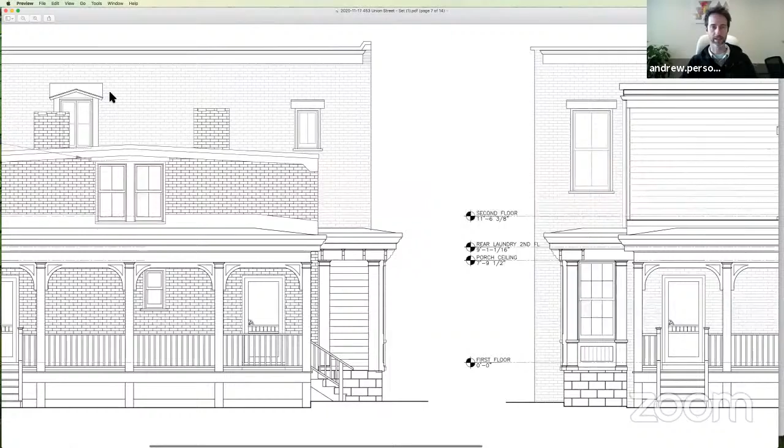What we would like to do - let me switch over to the original submission. In the original submission, the way the building appeared from the rear, we were bringing the brick line down. I'm going to draw a line for clarity. We were bringing the brick height to level across the building. Let me just make that a little thicker. So we were taking it down to level and then going up with wood from there to the height we were trying to achieve.

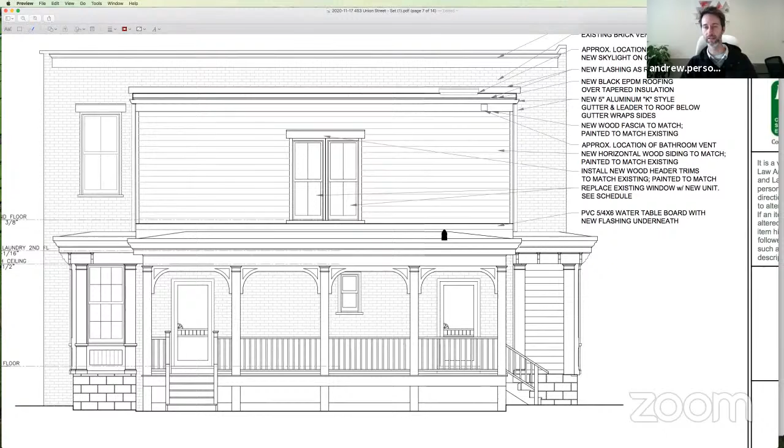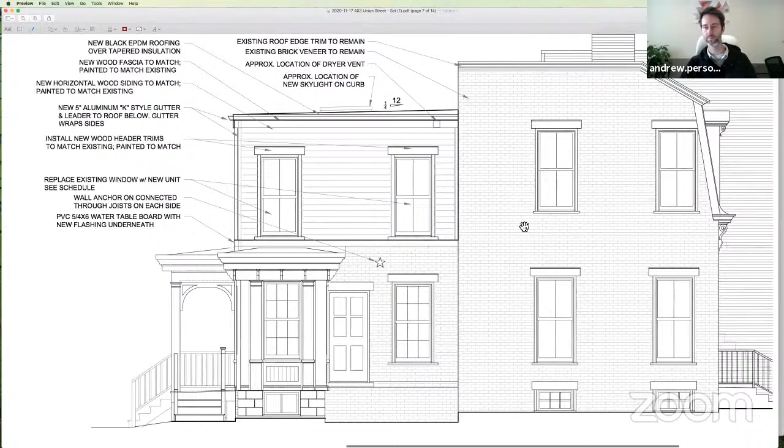So the difference between the prior submission and this submission is that now we would like to actually take the brick down to the sill height so that it's just wood for the upper level. We're keeping our window heights the same. We're keeping our windows - basically everything that was specified before is going to be the same, with the difference being where the line of the brick was. Before I think it looked a little odd, but the brick line was kind of at the center of the windows. Now we would have wood all the way up, and this is how it would look on the side. That's the only real change from what was approved.

Thanks, Andy. Commissioners, thoughts, comments, hopes, dreams? I think it'll look better this way. Go, John. Agree with you. Agreed. I also think, as a matter of approach, having this new renovation look different than the old one is kind of good from a preservation standpoint - it looks like it was a later addition, which it was. Agreed, I think it's just fine, and we really appreciate you discovering this during construction and coming back to share your discoveries with the board. That's terrific.

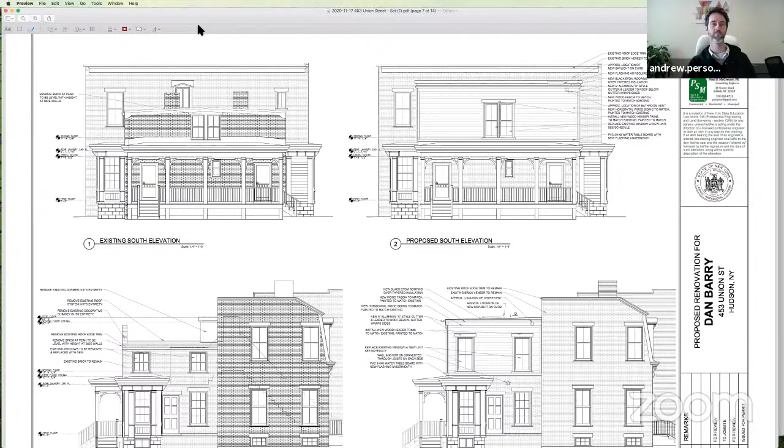60 South Front Street, which is a familiar address, but this is a small bit - I understand it's an awning to go in front of Kitty's. Who's here from 60 South Front Street? Ellie's here, but I'm actually on Matt's computer, but I'm here. Okay, hi, good morning. Whoever you are, go ahead and grab a minute to share your screen so we can see the awning.

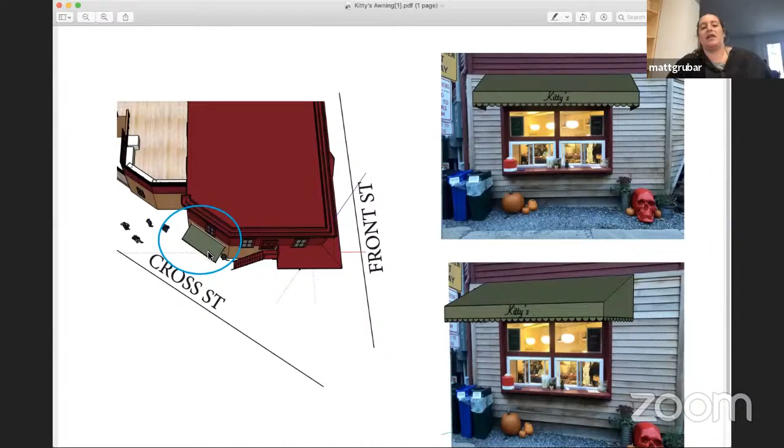Can everybody see my screen? Okay, yes. So on the cross street side, as a part of managing the business especially with COVID, we created this takeout window where customers, if they don't feel comfortable, can come up to the window to order coffee or food or groceries to go. It's become pretty essential for our essential business, and we've found that we need a little bit more protection from weather and inclement conditions for customers.

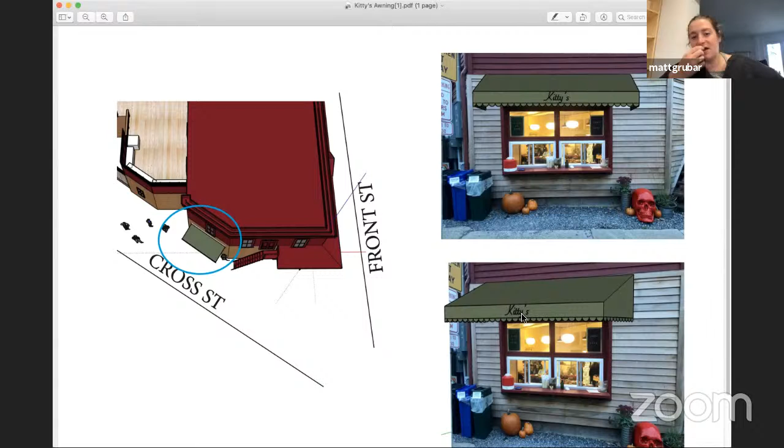So we are trying to do something that's least invasive and mimics the overhang you can see on the corner of the front of the building. We're proposing a small awning to go over the window with small gold writing that says Kitty's on it, so it can be identified by customers. It's no longer Halloween, but it will be there for a while. I don't know if there are any questions about the color choice or anything else.

I'll make a functional comment. I think people appreciate having something to shelter under when they go up to the counter. It looks good, and also it's removable, so it's not really marginal in terms of our authority to rule on it.

Yeah, okay, this seems pretty straightforward. May I have a motion to find the application complete? Make that motion for Kitty's awning. That's Paul Barrett, and a second please. Anyone? John, John, thank you so much. All in favor? Aye.

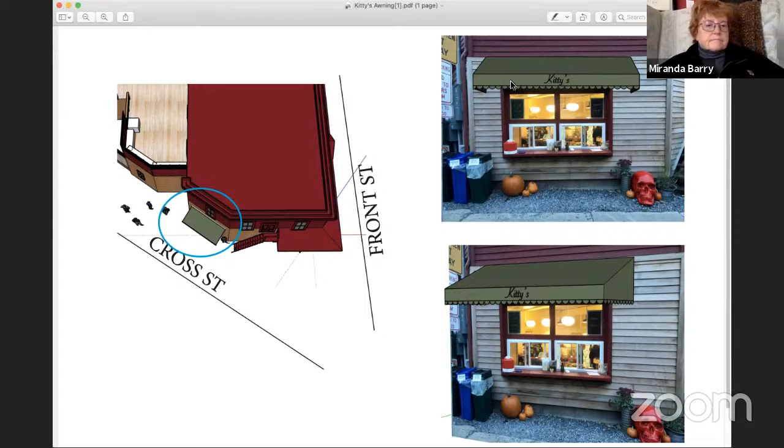Any opposed? None. Motion to waive a public hearing and request the city attorney to prepare a certificate of appropriateness for Kitty's awning. John, John, and a second. Second, Paul Martin, thank you very much. All in favor? Aye. Any opposed? None.

Unanimous, and congratulations on the awning and on your great shop there. Stay in touch with Craig. The city attorney needs time to prepare it, but we're done with it, right? Yes, we're good. Thank you so much, have a good weekend.

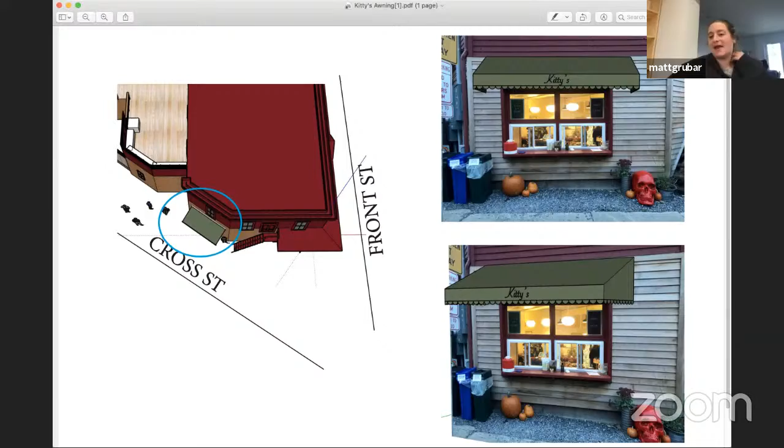Okay, next up — I'll ask Victoria, but in past situations I understood that the city could choose to decline HPC review as part of government, and I think that's part of 169. But the city wanted to come see us, and I'm totally delighted with that, I think it's great. So next up is City Hall, 520 Union.

Who's here to speak for City Hall? Hi, it's Peter Bujano, I'm the Commissioner of Public Works representing the city today. And with me is Mark Thaler, he's a principal with Lacey, Thaler, Reilly, and Wilson, the firm that prepared the feasibility study and ADA review for compliance.

As you're aware, the U.S. Department of Justice at one point did a survey of the city of Hudson and identified a number of deficiencies which the city was mandated to correct in a settlement agreement. One of those items was accessibility to City Hall.

So the city commissioned the firm of Lacey, Thaler, Reilly, Wilson to review the project and identify various options for accessibility. The city has decided to select option scheme 3, which would provide limited, not complete, elevator access to the second floor, but would provide accessibility in compliance with what was required or identified as deficient. It would provide an accessible main entrance, proper accessible travel routes, as well as improved toilet facilities.

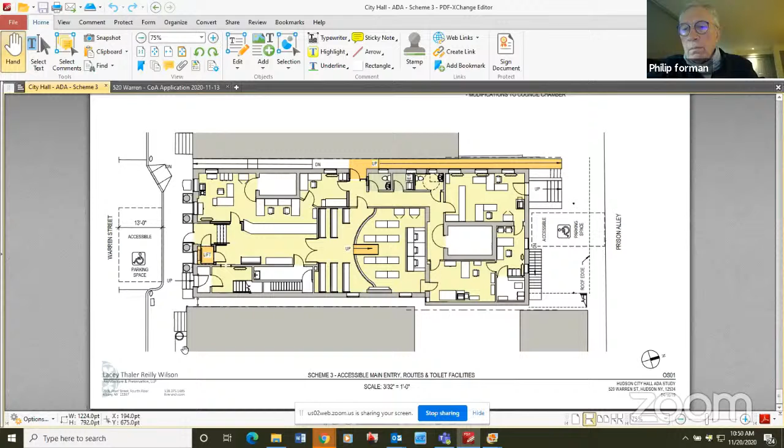May I have a motion? Hey, Phil, I'll make that motion real quick.

Just so you know, Phil, on your agenda — and it was presented by you as well — this is listed as 520 Union Street, but it's actually 520 Warren Street. Okay, but I did have the intelligence to label it City Hall, Craig. Just saying, I got it partially right. Thank you, though.

What about the motion? Where were we on going ahead and getting these folks a C of A for the demo, with the understanding that they're going to come back with a presentation on the actual solution?

Well, I'll make the motion to find the application complete. May I have a second, Hugh? All in favor? Aye. Any opposed? None.

Motion to waive a public hearing and to request the city attorney to prepare a C of A for the demo, with the contingency described to keep as much material as possible. Anyone make that motion? Hugh, thank you. And a second? Miranda? Miranda, thank you. All in favor? Aye. Aye. Opposed? None. Terrific.

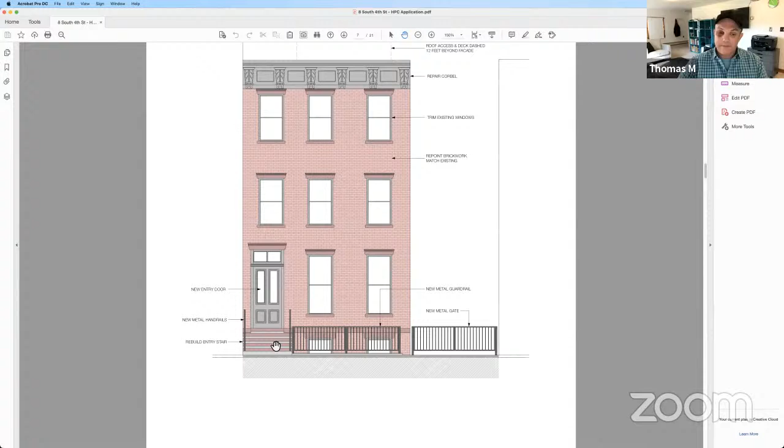So if I shoot to the next one, you can kind of see some of the issues we're dealing with. So basically the main elements are going to be rebuilding this doorway here, installing these windows, the lintels, replacing the door under the stair, and then rebuilding this whole stoop element so it's structurally sound, so you actually have access from the street down into that area.

In addition to that, in speaking with Craig a little while back about the handrails, guardrails and fencing, I do have some photos of the older stuff I can show you. Craig mentioned that because this is new work, we need to be more aware of the codes and that private-public interface, whereas before it was a very simple single rail everywhere and the rails were relatively low. We wanted to bring that up without impacting too heavily on the building.

Other small areas we'll be touching up. One of the corbels is in disrepair, we have all the pieces and we'll be repairing that back to its original look. The windows themselves need some minor trim on the outside just to seal them up. And then the final application will be repointing the brickwork on the front of the building.

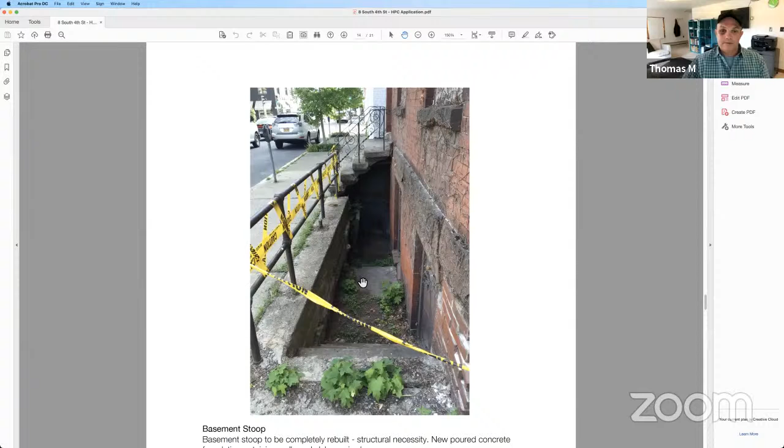You can see these are the basement windows, which haven't been replaced yet. There's a small wooden panel door located under the entry stairs. We're looking to replace that with something like a metal door for security and longevity. The basement will primarily be used for services, so we want something more robust down there. Being in that stoop area, it's likely to get a lot of snow and other accumulation, so we'd like to keep something practical.

Following on with the gate here, there's a gate that was installed some time ago. We'd like to replicate the handrail style into a new gate, a very simple, minimal looking structure, not impactful on the space at all, but tying the front gate, the handrails, and the stoop area together.

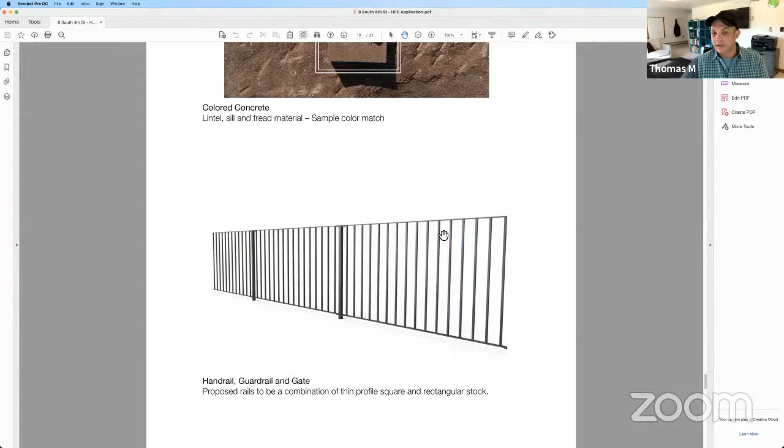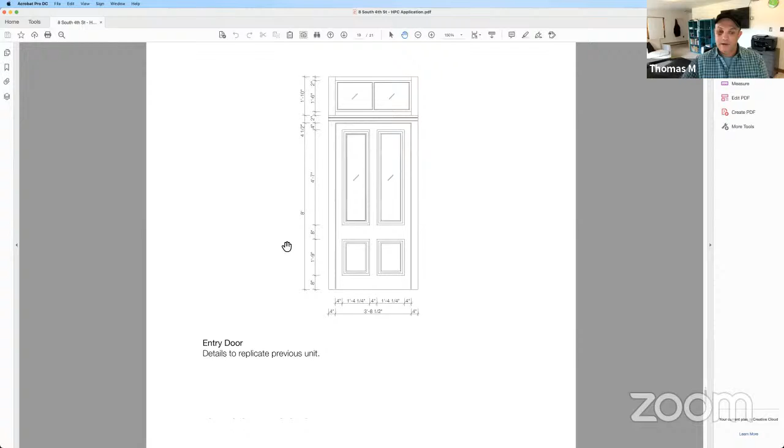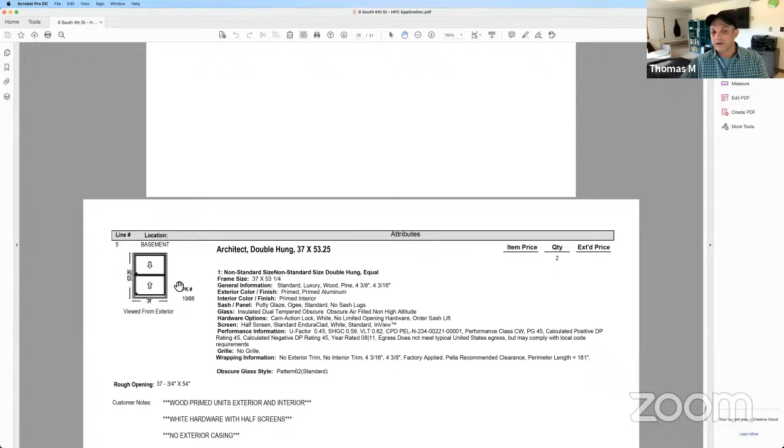With regard to the windows, these were purchased as part of the earlier package. These are the two basement windows which will be going into that stoop basement level.

So I'll run back up to these two here.

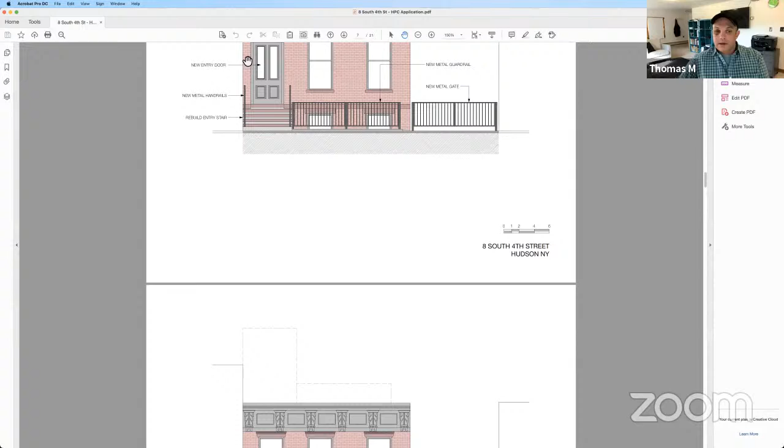So in recap, a lot of this work has been done. We're just taking on the next phase: repairing the corbels, a new entry door, this band line, these lintels, these sills will be replaced, the windows will be replaced, and the door to the basement will be replaced.

And then from the street view: new handrails, new stairs up, a new guardrail, and a new metal gate to once again tie the building in, not subtract too much from the building, but still provide a level of security and compliance for what they're doing.

Oh, I can't hear anyone. Ladies and gentlemen. There we go.

I just want to say, I think everything presented is terrific, and this building certainly needs work, and it's going to be nice to see it finished.

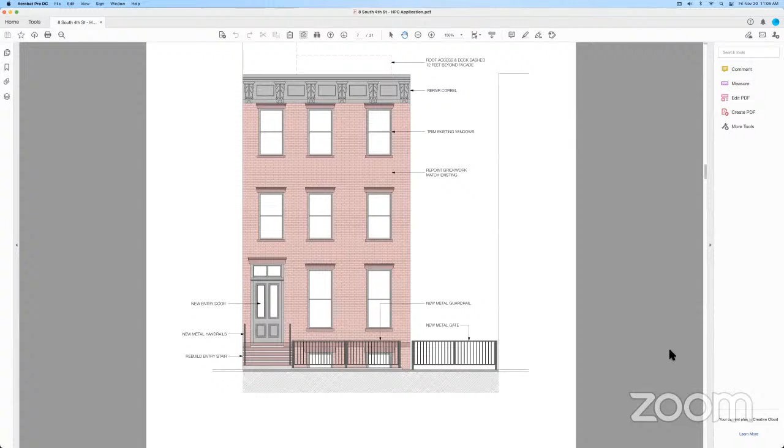My question regarding the double doors that you're going to make a single door, will the single door be the same width as what the two double doors were? Yes, I believe it's about 38 or 39 inches wide, so it'll be fairly similar. I don't know if it'll be quite the same, but things will be proportioned to be the same. It may be slightly smaller, but the proportions will be replicated.

I'm just curious why you wouldn't keep the double doors and would go to a single door. Because it opens straight into the living room and you can't really seal the double doors.

And the proposed single door, then the panels, the sticking around the glass, would be identical to the original unit's door.

Yeah, so all that material was stored in the basement when they took all that stuff out, so that's all still there. So it's able to be either reused or replicated, but the original material is there.

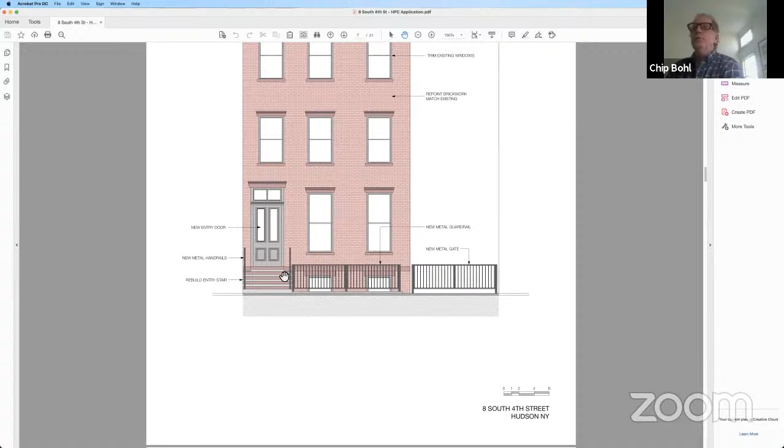The brownstone stoop is to be replaced with concrete treads and landing that would be of the same profiles as the previous stone, correct?

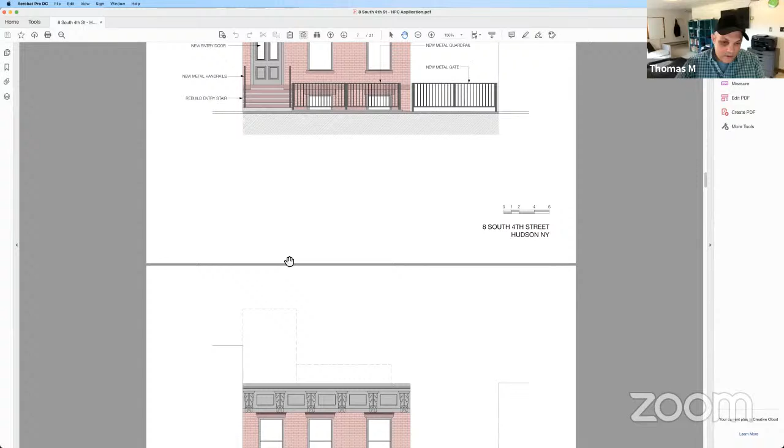And that's just square treads, and there's no bullnose or detailing in any of that? Those are square blocks of brownstone. No, there was a little bit of detailing I can show you, but most of it has eroded into fairly awful condition.

So you can sort of see on this one here, it does have a little bit of detail. It seems to have a little bull nose, but it seems like they've poured 2, 3, 4 inches of concrete on top of it. We could look at having a nice bull nose put on them, or a slight return or something like that.

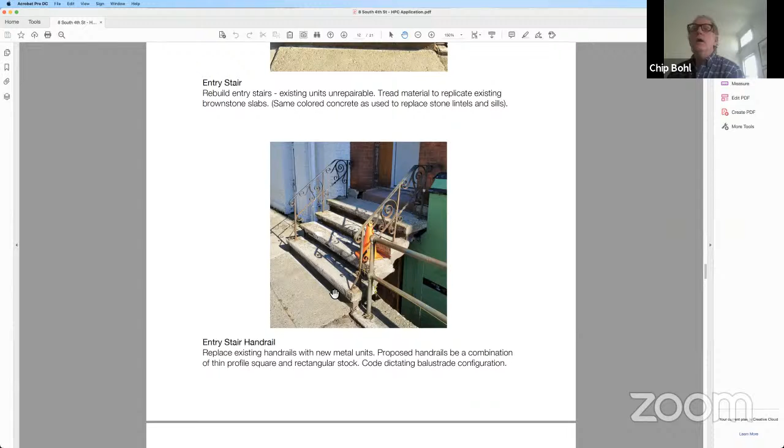It would be very useful to know what the exact profile of those were. If there was a bull nose that returned, that would be interesting to try to keep. As you can see on this photo, you sort of see the degradation of everything. So I think it does look like there is a small bull nose return on it.

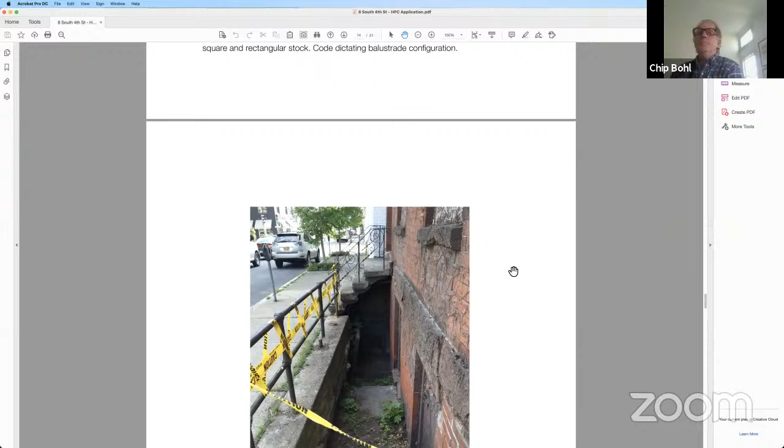But other than that, the detail's fairly hard, everything's sort of eroded, and I think the concept of replacing that heavily deteriorated stoop with new cast concrete 'brownstone' is a good solution, rather than using another type of stone, because brownstone is very much part of this original architectural composition. So it's very desirable to use brownstone, and because brownstone isn't terribly accessible nor very weatherable, I find it satisfactory to look at doing a cast product rather than genuine stone.

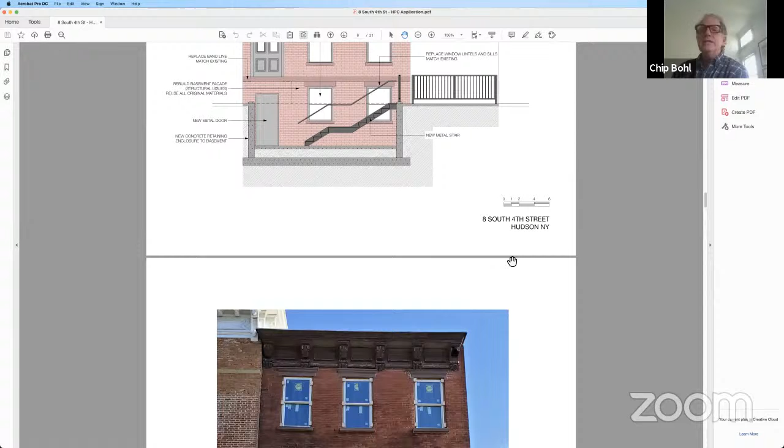And correct me if I'm wrong, but the lintels and the sills of this building have already been replaced with that cast product. Is that correct? Yes, so I've got a photo up at the moment of the facade. We took a long time to find a color match material. Obviously the weathering that happens, some of the stone is lighter and some of it's darker, but I think we really sort of hit on a good medium.

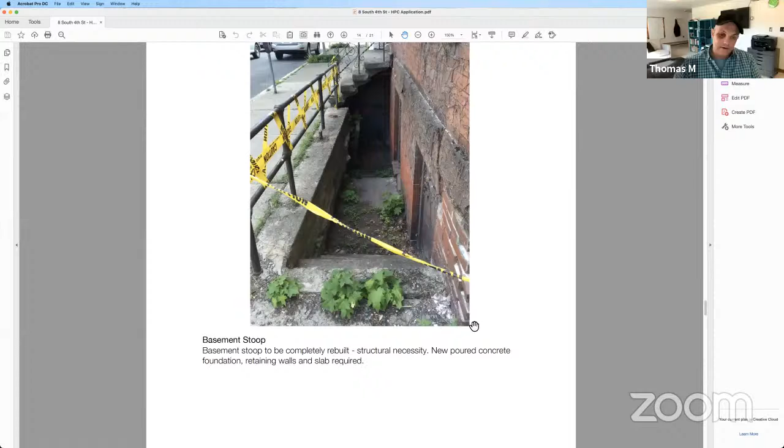To replicate what's there. And as you said, the wearing capabilities of brownstone and the availability of it are two problematic issues. So you can see on this one that sort of color matching. I'd also really like to see the

reuse or rebuilding or replacement of the original handrail at the stoop. I know that there's a code compliant issue with height and with spacing, needing to have a limitation of a 4-inch sphere in that.

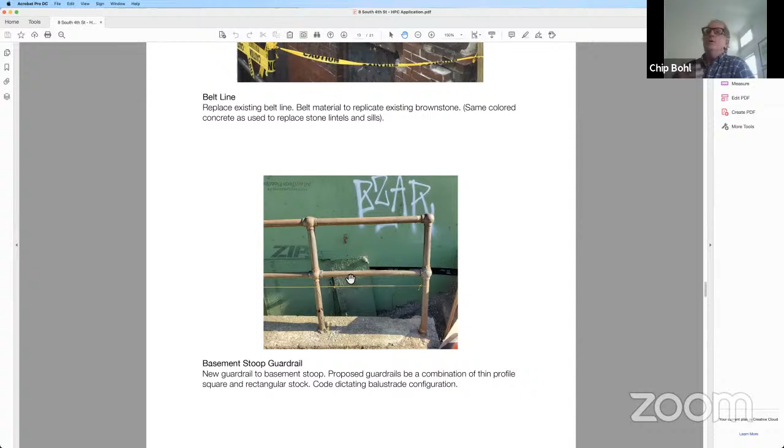However, that ironwork is really wonderful, and I think in the community of Hudson we have some terrific ironwork that fortunately has survived. Certainly not all of it has survived, but I think it would be terrific if we could begin to support the craftspeople in our community capable of reworking that ironwork, being very creative in the design so that it both reflects the original design but also complies with the current safety requirements of the code.

Yeah, I agree really strongly with that. This is quite unique ironwork, I haven't seen anything exactly like it elsewhere in Hudson. And I think it's fine to replace the pipes in the front with the railings you've proposed. But if there would be any way to reconstruct this ironwork that currently exists as the handrails for the steps, I think it would be a real shame to lose that, because it's quite a unique feature.

Sure. No, I agree. I think, assuming it can't be restored - you're going to cut a lot of it off - it's something we can work with. I think there's enough material there. We may be able to reuse it for certain elements.

All right, I'll just note that down to look into the handrail at the stair and what can be done to either keep it, refurbish it, and improve upon it if we need to somewhat comply with the codes.

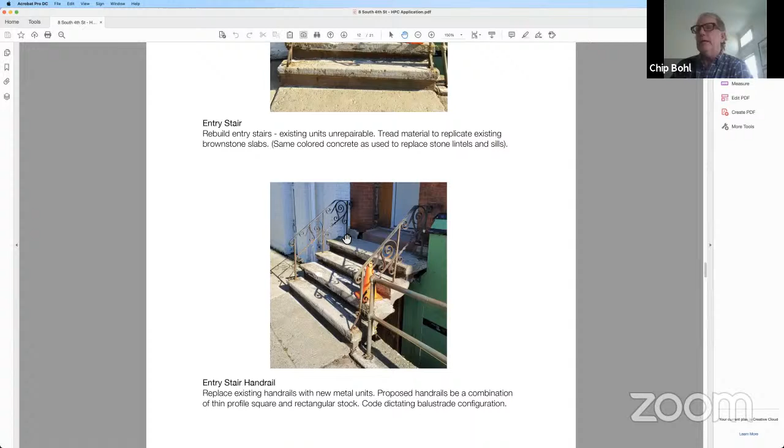We're working - my architectural office is working on a project on Warren Street at 422, and we're looking at rebuilding an earlier handrail there as well that was totally lost. So we're actually right now looking for craftspeople that can do this work. So if you come up with somebody, if you find that talent, please let me know. And I will certainly let you know, because we're actually searching it out right now in the Albany, Troy area and learning.

We're trying to learn some of the history of the ironwork that's been done here in Hudson, because I think it's really an important part of the texture and the architectural interest of the city. Sure, I'll definitely pass that information on.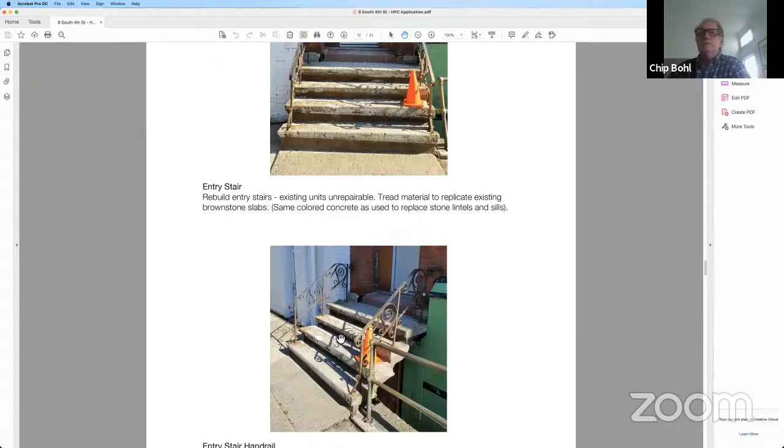Looking at this handrail, in the demolition stage we could probably be fairly nimble with what we do to try and retain as much as possible, and we may be able to reuse it. Certain elements have been embedded in concrete for a long time, so we'll have to see. But it looks like it's mild steel that could be welded back, extensions on the stems, and so forth, could be reworked.

And then possibly a secondary element added to this design that could create the 4-inch enclosure that we need in the current code.

I did a restoration of a stoop at 515 Union Street a few years ago, which was a different thing because it was urn-shaped columns as opposed to wrought iron like this. But we were able to put thin iron rods in between the columns, and it solved the code problem, and it looks really great.

You may be able to do something like that, at least with the lower level. It would just be a great shame to lose this detail. But with regard to the other areas, does it seem fine to keep it simple, or do you want to keep this sort of two-rail setup for the rest of the stoop?

Personally, the railing you proposed is fine, and I do think that from a safety standpoint, it makes a lot more sense. I agree. Others may feel different. Wonderful, okay, so that's great. So that really gives us a little bit of time to work on getting this area sorted out.

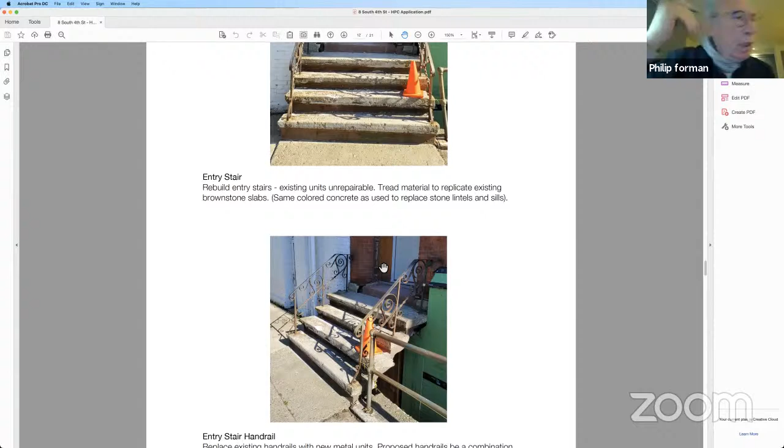Okay, well said. I think we should be able to go forward and take a motion, find the application complete. I'll continue to address the contingency. It's understood on the railing. But other than that, can we find the application complete?

What about the stairs? Are we requiring a bullnose on the stair treads? I lost track of that one. There was no closure on it. I think that had been brought up as having a high probability of being part of the original treads, or some suggestion of that. And I don't think Thomas was concerned one way or another. Thomas, go ahead.

I think I'll investigate further. I think Chip brought it up. We'll try and accommodate something a little more historical to fit in with this, on further investigation of just those small elements, if that works for you.

It's hard to write the Certificate of Appropriateness based on further investigation. So either we leave the stairs out for the time being and you return, or the board approves your plan.

Well, we could leave the stairs somewhat out because a lot of it's going to be investigative work, actually pulling it apart. So, okay, you know what I mean? Or we add it in with some sort of caveat.

When you say this whole area, Thomas, are you referring to both the treads and the railing? Yeah, so I think we're going to have to basically dismantle this whole area just to keep the railings and have a little more understanding of the treads. I can go down there and have a look again and see what we can do in the intervening time.

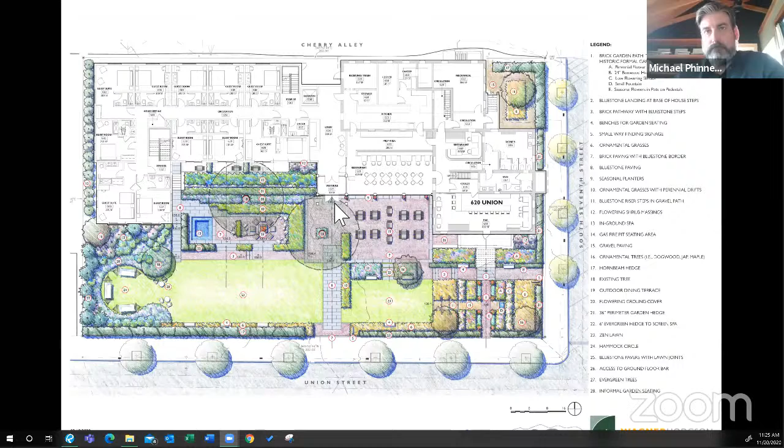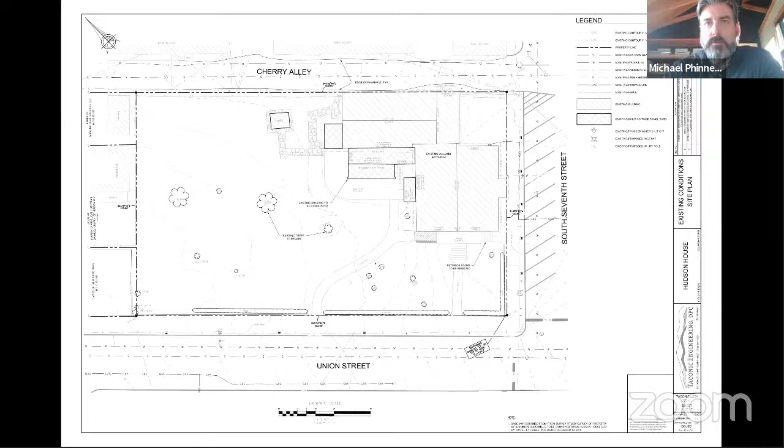Just to refresh everyone's memory about the project: it's bordered by Union Street, Cherry Alley, and South 7th Street. There's a historic core of the building, the McKinstry Mansion, the 1835 portion, and the 1906 addition. Those are the two areas we're really focusing on for restoration and preservation.

Unfortunately, there were some poor additions or replacements done over time. The front porch was completely lost and replaced with a steel and concrete building. Then a stone enclosure was put on the bottom of the porch, and a new side stair was added, which broke up the symmetry of the original design, the front porch with just one main central stair.

You'll see later on that we're going to preserve and bring back the original porch. We did some historical research from older photos to understand what that design was originally.

There was an elevator tower added onto the side of the building for accessibility. In the new design, we're tucking that in the back as part of the addition, removing this, and restoring this facade. There was also a series of historic porches here that were all removed.

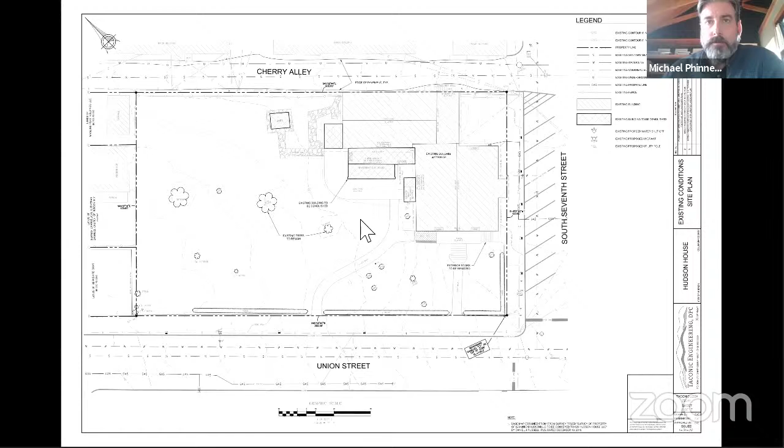So moving to the next slide, I'm going to let Dale from Wagner Hodgson talk to you about the original proposed landscape design, and then the revised design. Really, the simplest way to say this is pretty much everything is staying exactly the same with the exception of this bay over here. Can everyone see my cursor?

That bay of the building is being slid forward one bay. The reason is, once we got into the initial cost analysis and construction estimating, all of the shoring and deep excavation required along Cherry Alley for the basement, we had a full basement under the entire new addition previously, was really driving costs up considerably.

So in the new design, we're proposing a much smaller basement that would alleviate some of that shoring and complicated excavation. When we do that, we lose a lot of storage that was critical to the building's function as a hotel and restaurant. So by sliding this forward one bay, we're getting a large storage room and housekeeping area on every floor. That's really the big change and what's caused us to need to come back to you today. You'll see that in the next slide.

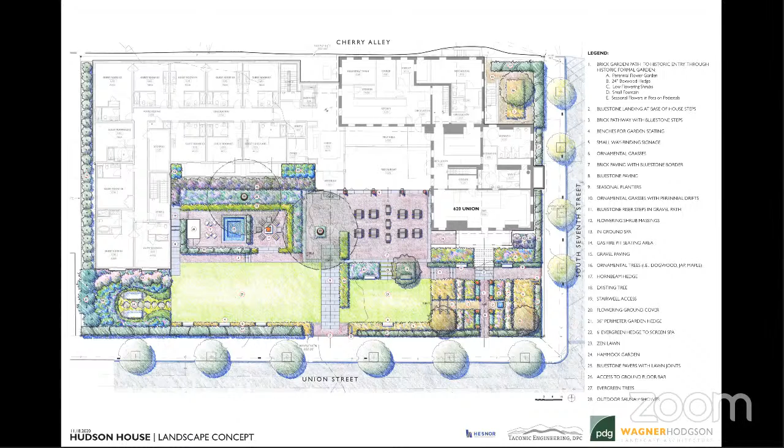For another conversation, I'd suggest somebody contact me after your discussion with HPC, because you also went through a site plan, and if that's altering your existing site plan, you may have to go back to them as well. Yes, we're planning on that. Okay, thanks. Thank you, Craig.

Okay, I'll just kind of quickly go over the landscape concept again to give a summary of what was presented in the past. Since there doesn't appear to be any historic documentation of the original landscape of the mansion, our concept was to create a probable landscape narrative so that the design is in tune with what might have existed when the McKinstry Mansion was built.

There likely was a formal garden at the entry, and a fair assumption can also be made that the landscape and gardens to the west of the house were either a series of garden rooms or a large open lawn, the latter of which we've included in the design to create a park-like setting under the shade of large existing trees, which we're maintaining. As a vestige to the historic picket fence that once edged the property, we're proposing a border of shrubs to provide that defined edge, which we feel is friendlier and more inviting than a fence.

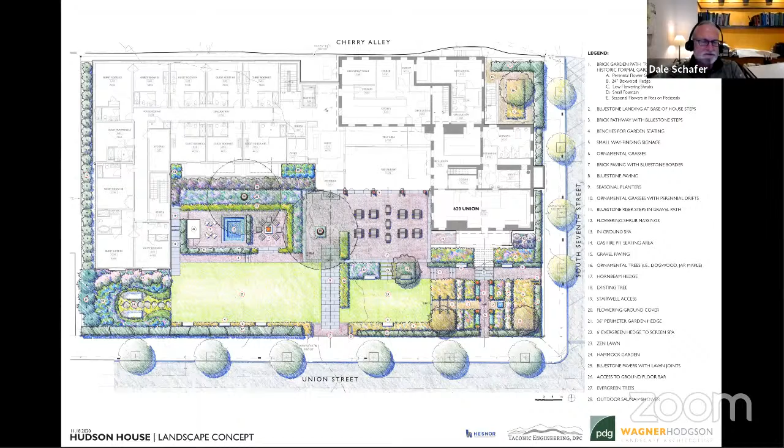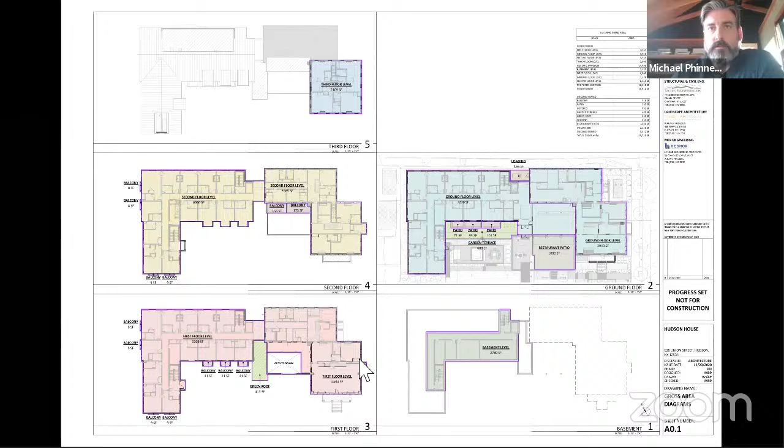Cherry Alley really doesn't get affected by this at all. The only exception is at the back, where there's a parged concrete plinth that exists on the 1906 addition. Along Cherry Alley, we felt we should try to match that material, color, and texture. That's a refinement in the design as we've moved toward construction documents and final detailing.

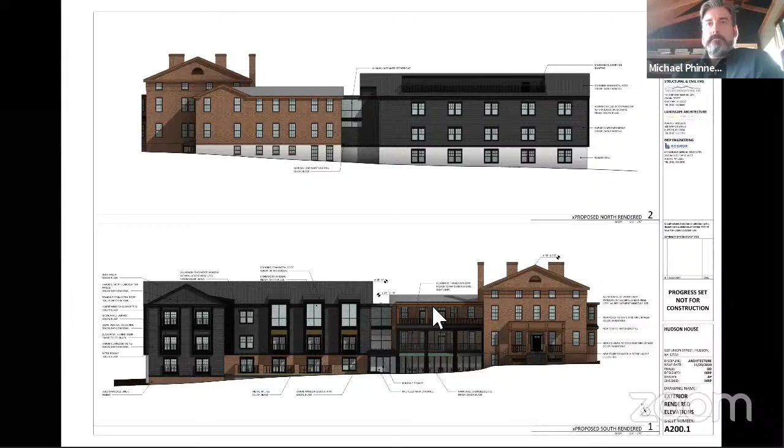Again, the big change is moving this element from about here to here, so it slides out with the parged plinth. The brick will wrap around this side onto the west side. We're doing the small Juliet balconies again, and the enclosed gable end. This is pretty much exactly as shown previously.

On the McKinstry Mansion side, this is largely just a restoration project. The big change here is we'll clean and point the brick. We're using new windows to match the historic look and profile—unfortunately the existing windows are full of asbestos in the glazing and caulking, so they're not salvageable, but we'll provide new windows to match those details. And then the new porch here.

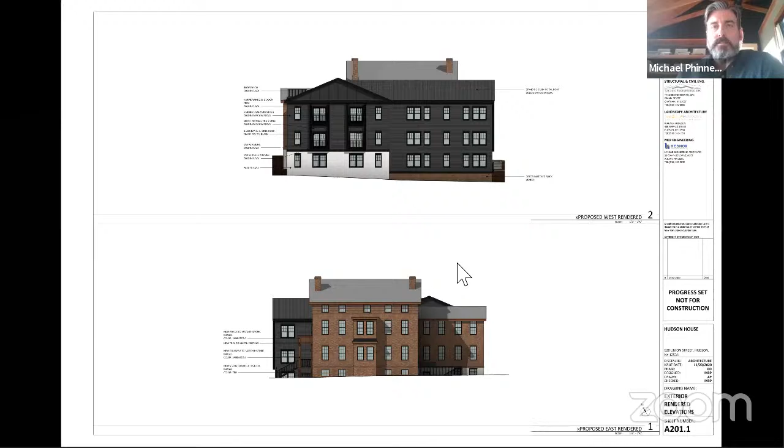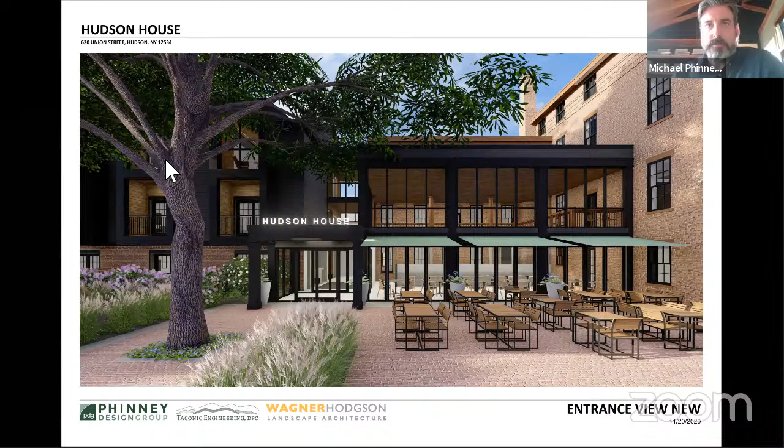This was the original, just to give a before and after of the four photorealistic renderings we did for you last time. This was what we presented before, and this is proposed—you can see there's really no changes here at all. The only thing we changed is we found a tree more closely reflective of the branch structure of the large tree that's there now, a bit of artistic license. The tree canopy has been updated.

The landscaping has remained the same, and you can see the dining terrace patio. This is the facade I was talking about, where we're focusing on a high degree of transparency, so you can see the new dining balcony, the restored balcony beyond, and the facade beyond.

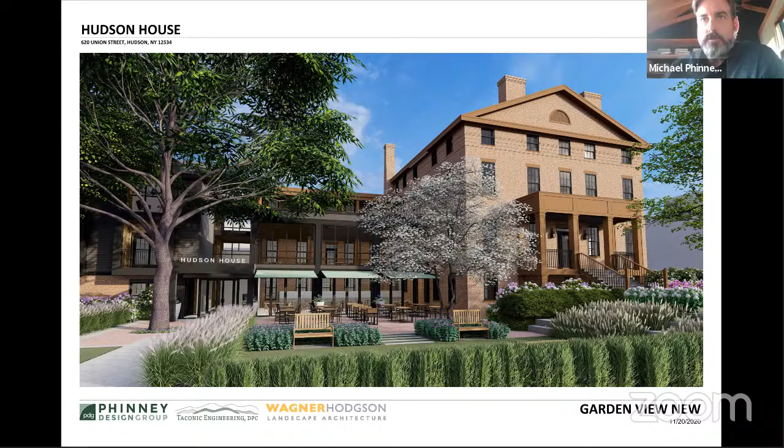Moving to the next, again this was the previous view, now zooming back as if you're standing on the sidewalk on Union Street, looking at the main facade, you can see the porch elements we're bringing back. Proposed, again this really remains unchanged—the only difference is we updated the tree scale and canopy to be more closely reflective of what was there, and you can see the grassy areas that will be incorporated.

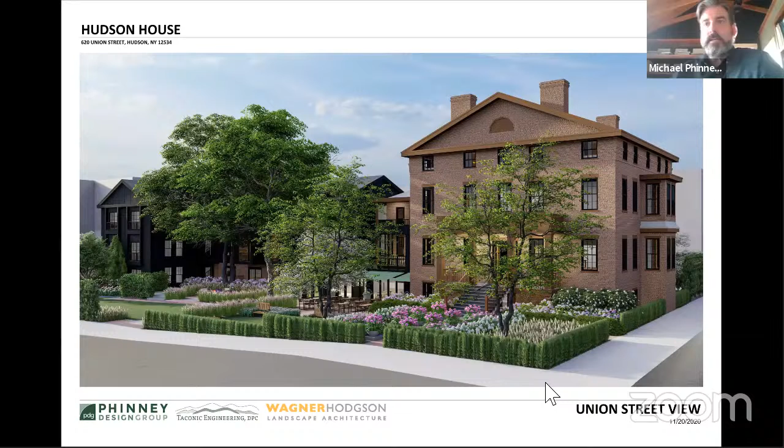This is now standing at the intersection at the corner, looking back at the entire project—this was before, and then the after. You can see the big changes: this is slid forward slightly, but all the lawns and gardens, the trees and new trees, are all going to be in place, and the hedges will remain.

So I'll pause there to see if there's any questions. Zooming in, this is as if you're standing in the lawn area looking at the original design. You can see these shed dormers project and become a sculptural element. With this facade sliding forward, we've added another one here just to break up the facade and define it a little bit.

It actually works off the stair landing, so it gives a spot for a guest to step out and look at the gardens. The spa, sauna, and fire pit area is tucked in here behind this hedge and some private landscaping. The far lawn is maintained, and the upper lawn is also maintained.

Michael, what's your next step in approvals? Do you go to planning as your next meeting? Yes, so the next step would be to go back to the planning board just to give them the same update. Hopefully we're successful there, and then we'll move into construction documents where all the additional level of details and materiality will be finalized, and we can come back to you for C of A.

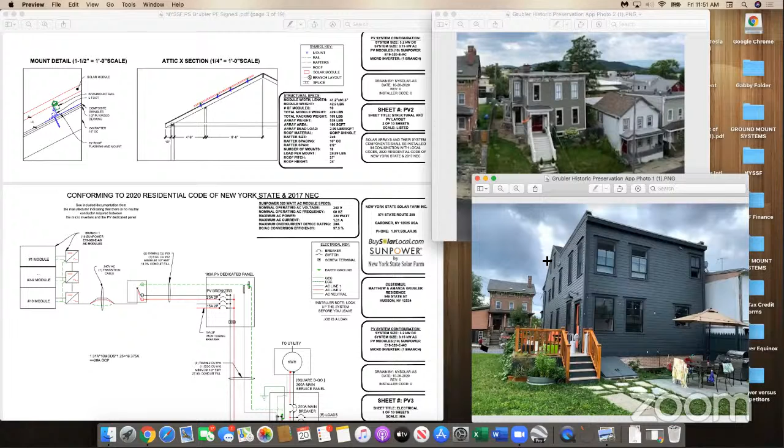Phil, I do have that, and it appears it didn't go through in the email, so I'm sending it now to everybody. They can share their screen if it gets complicated, we'll find another way. But if this is understandable through the screen share, I'm okay. You guys should be able to see the screen now.

This is the plan set here. We're using SunPower solar panels, which are the most efficient. They do take up less space. These are the 320 watt panels, and we're putting 10 of them on the front side of the roof. This is the actual original building, I believe, right Matt?

That building is across the street, so if you were sitting on the roof, that's what you'd be looking at. Okay, so this is the original building across the street. This is their building now, and it's comp shingles. The panels would go on the front of the roof here. This is the back side, the only picture that I have. But this rendering here is the design where the 10 panels would go, street view, and this will give a layout to everybody.

Now, this system is integrated with a mounting rack, but there's no shown conduit, so it's just gonna look like it's gently placed on the roof space here. Yes, that's basically the idea.

Gabby, are there any other modifications to what we're looking at, or are we simply talking about the installation of the solar panels on the roof? Just the installation. Okay. I'm sorry, are the panels on the roof facing the street or the back roof? The street.

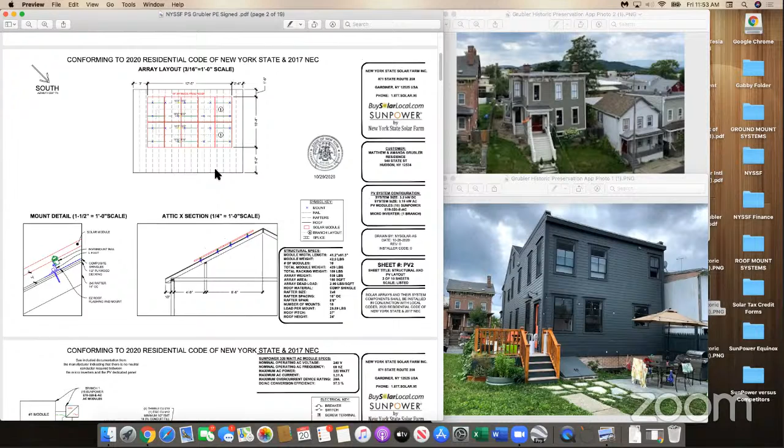Do you have a photograph from the street? I'm trying to pull one up right now. So that would be what you'd see from the street. I'm pulling up a picture also. There's one.

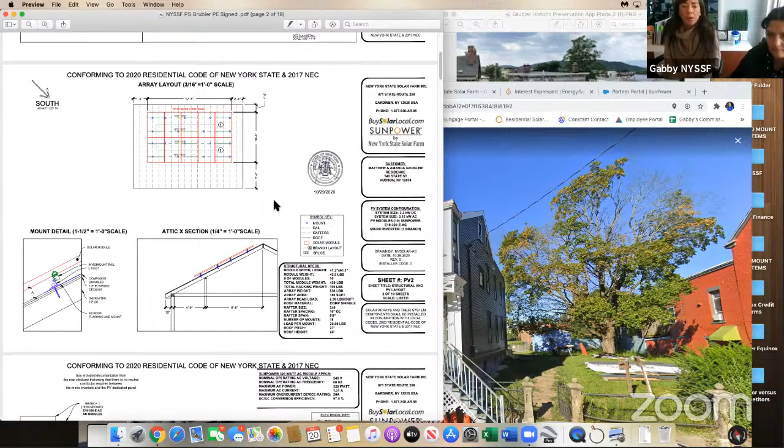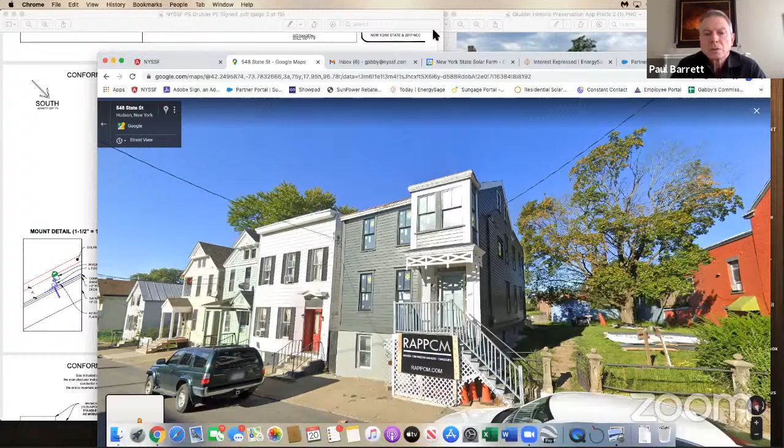I have another picture that shows the whole roof line if you want me to screen share that. This was taken from the house diagonal across the street from ours. This photograph you're showing us now is taken standing on the raised property across the street, not standing on the sidewalk, correct? This is not standing on the sidewalk, this is raised. The first one is standing on the sidewalk. So we're actually seeing a little bit more of the roof than what we would actually see from the sidewalk. Yes, in this photograph, that's correct.

Thoughts or comments? I think we have reviewed solar panels more than a few times and pretty much gone with them. One sec, there's another one, let me find the screen. Oh, here. This picture is from the street level. Is that the current staircase? Is that what it looks like now? Is that the most recent photo? Yes.